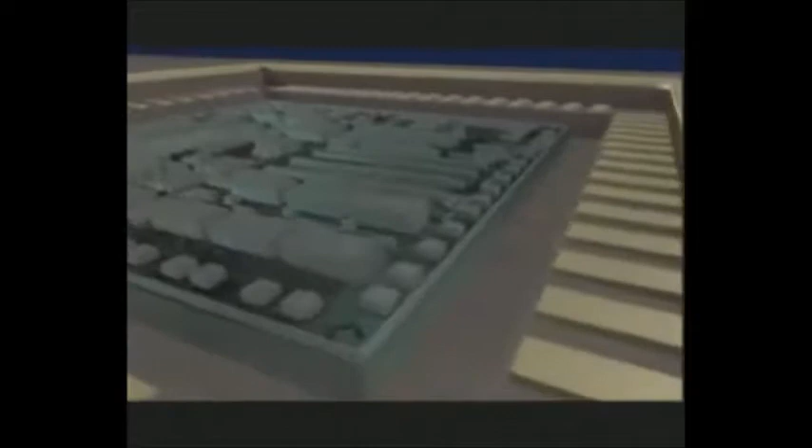The building blocks in chips are not only becoming ever smaller, but our designers are also making the chips cleverer all the time, so as to create new possibilities continuously. This makes the equipment controlled by these chips better, safer, easier to operate, more energy efficient, and friendlier to the environment.

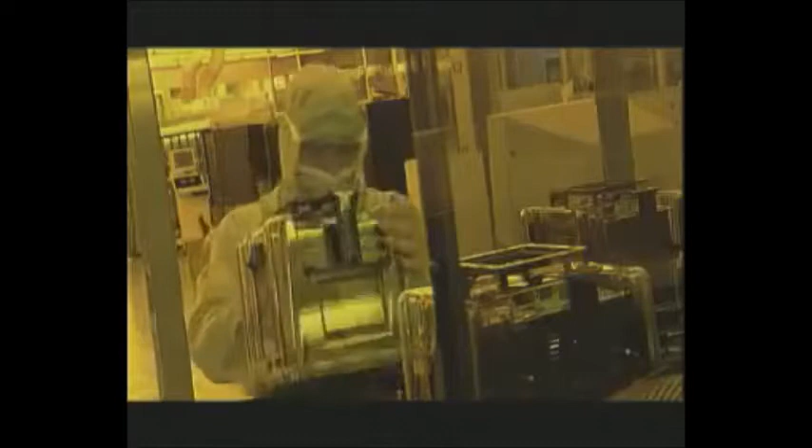Let's stride in 7-league boots through the ingenious process by means of which products such as chips are produced at Philips Nijmegen. We'll explain aspects such as the most important steps in the production of ICs, and to make this easier to understand, we'll begin with a series of animations.

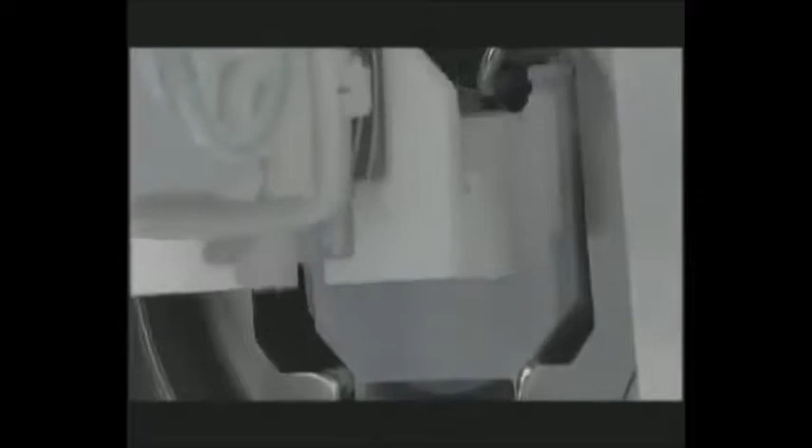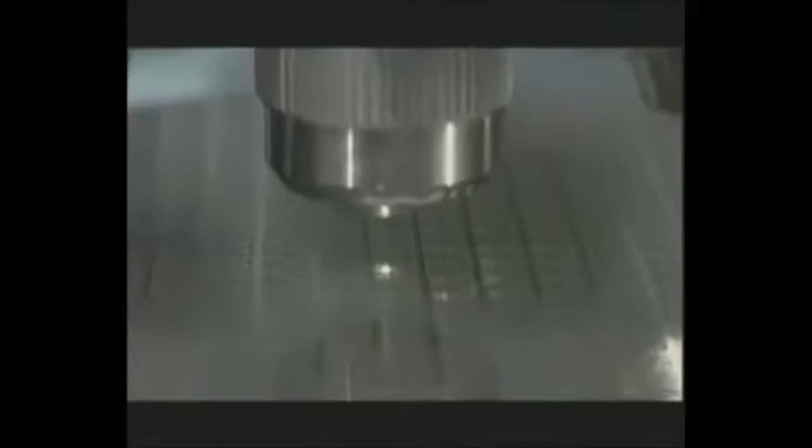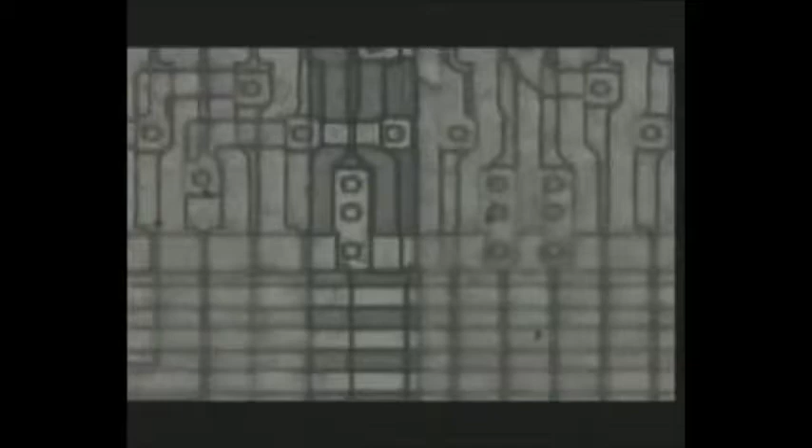A chip is an extremely small silicon plate, ranging from a couple to several dozen square millimeters in size. This tiny silicon plate is then filled up with a great number, sometimes millions, of microelements such as transistors, diodes or resistors, which together form an integrated circuit, the IC. We make a large number of chips all at once on a round silicon disc called a wafer or slice.

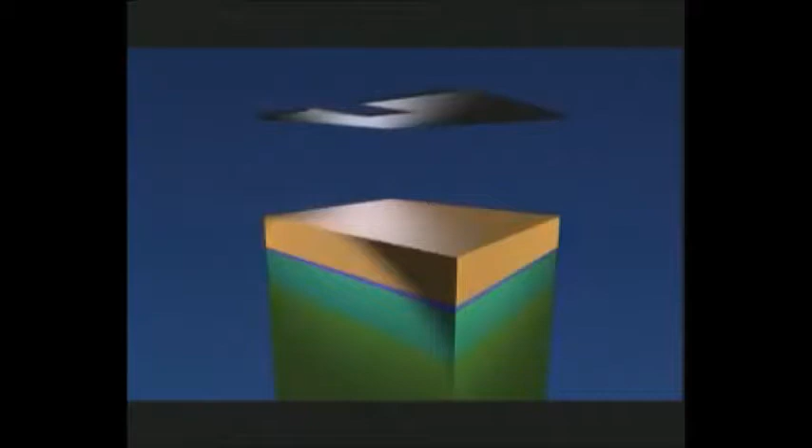First of all, we create a new layer of silicon on the slice, 1/100th of a millimeter thick. We then oxidize this silicon layer in an oven, so that an even thinner insulating layer is created on top of it. We then apply a coat of light-sensitive lacquer. We expose the lacquer through a kind of photographic negative, so that the lacquer dissolves in certain places.

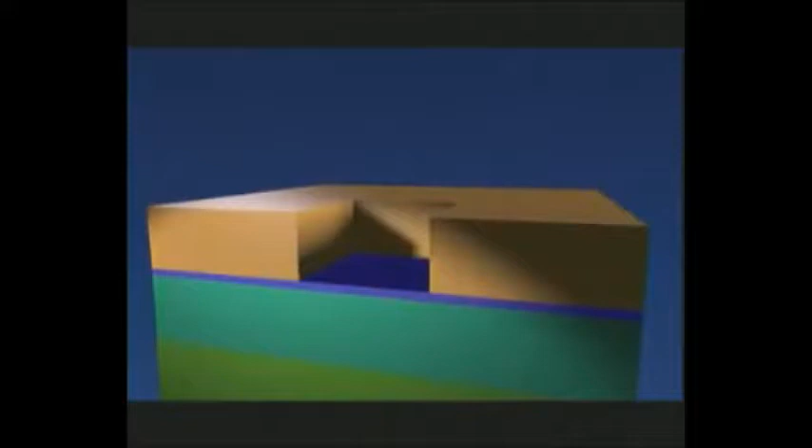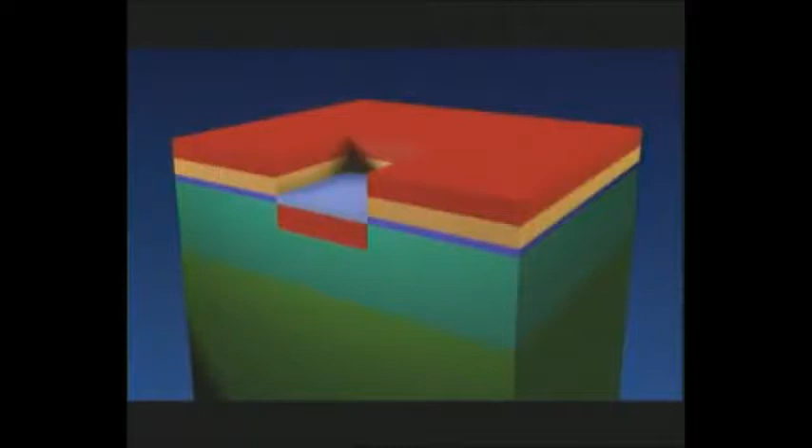Then, in the places where there is no more lacquer, we shoot atoms with great accuracy through the oxidized layer into the silicon. The layer of lacquer is then no longer required and is therefore removed from the slice. We then ensure that the atoms penetrate a little deeper into the silicon by a few thousandths of a millimeter.

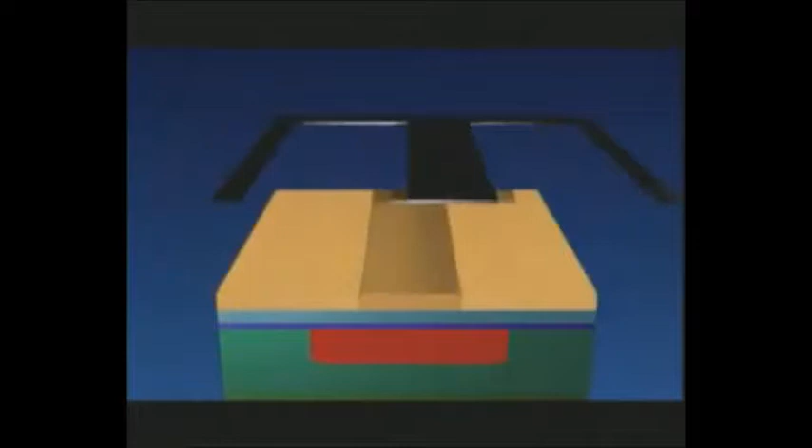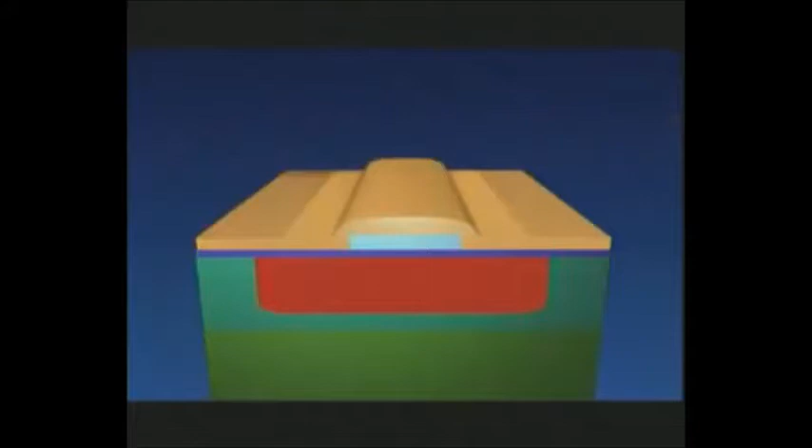A new silicon layer is applied over the oxide layer. And once again, a layer of lacquer is applied, exposed, and developed. The silicon which is uncovered by this process is then etched away. Another series of treatments involving lacquering, exposure, bombardment with atoms which penetrate the silicon, new oxide layers, etc. is performed until the whole pattern is complete in all its layers.

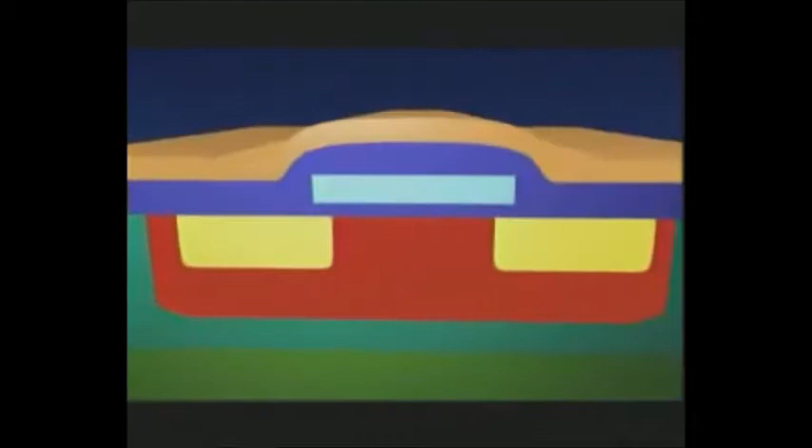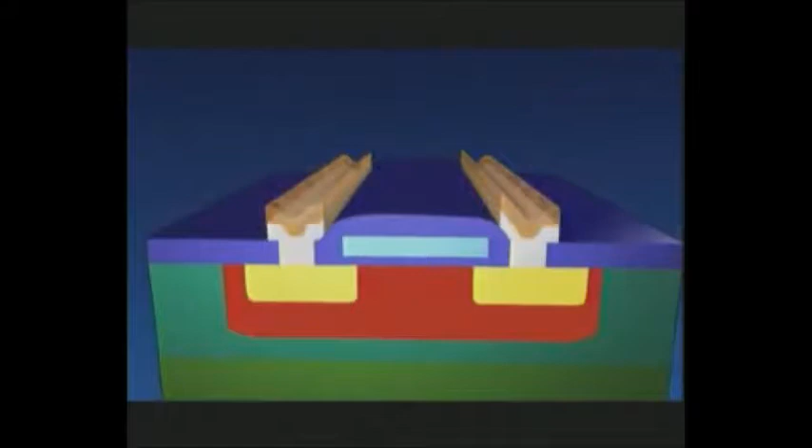Some 300 to 400 process steps are required, along with 15 to 20 different masks with microscopically small patterns. The final step in the process is the connection of the various, almost invisible, tiny elements in the silicon. This is how we make an electronic circuit, an IC or chip.

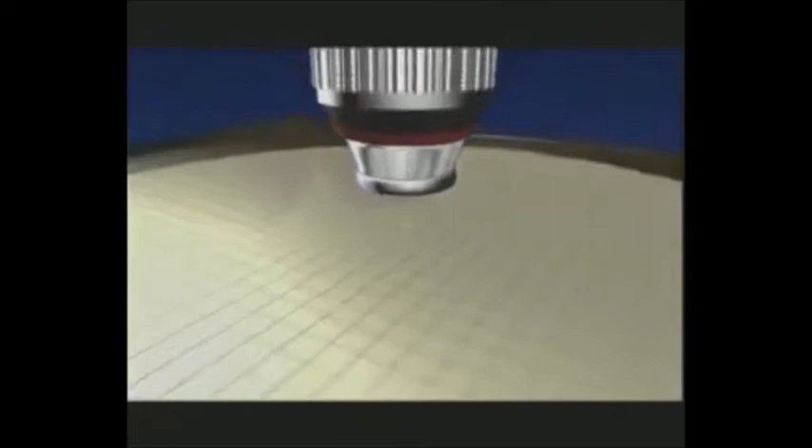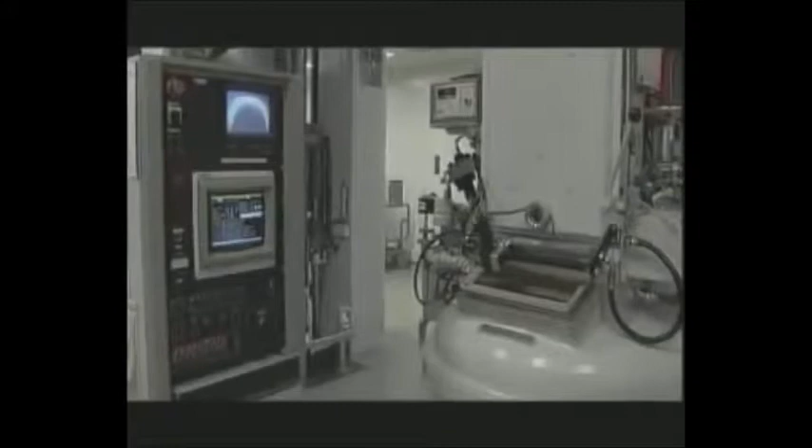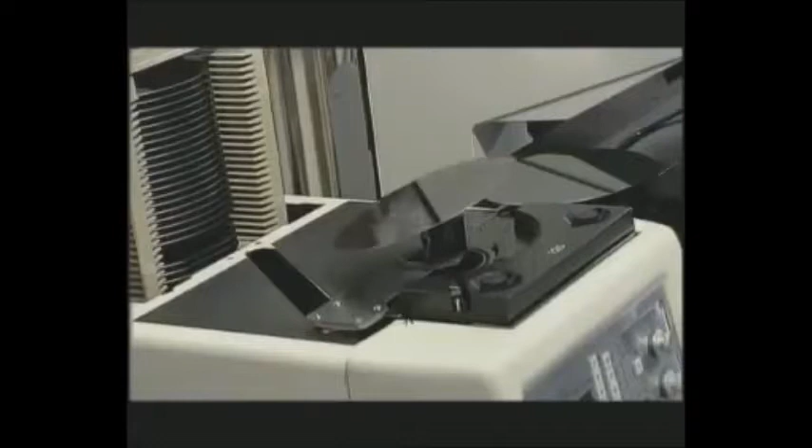Naturally, we have a particularly good relationship with our suppliers, as they too play a part in determining the final quality of our products. Silicon is made from ordinary quartz sand, and rods of silicon are then created, or drawn, at extremely high temperatures. Thin slices are then sawn off these rods with great accuracy. The ICs will be produced on these slices of silicon, for which purpose the slices will undergo 300 to 400 processes.

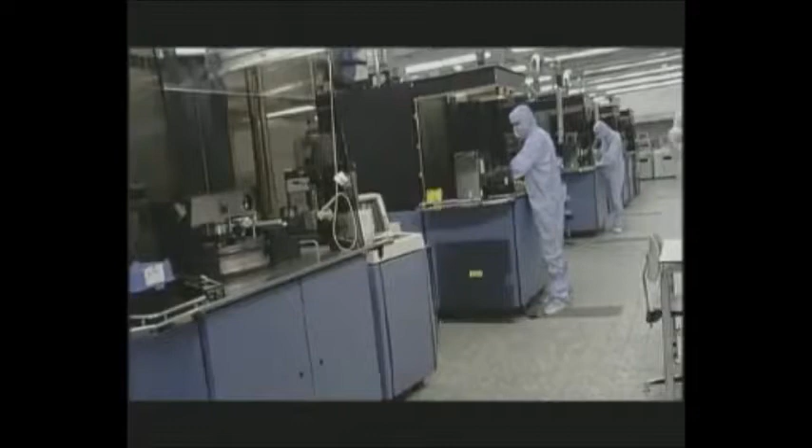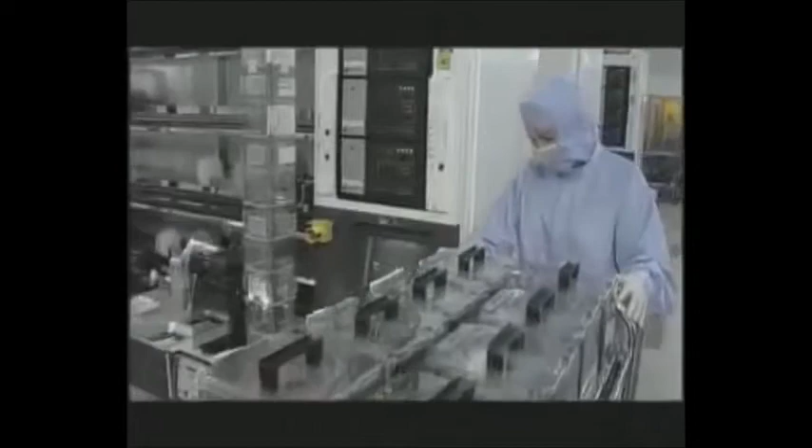The first step in the production process is as follows. In this special oven, the slices are covered by a new thin layer of very pure silicon, into which the transistors and other components can be built. The slices with a new layer of silicon are placed in other boxes, where the silicon is allowed to oxidize. This insulating oxide layer can be removed at a later stage when necessary.

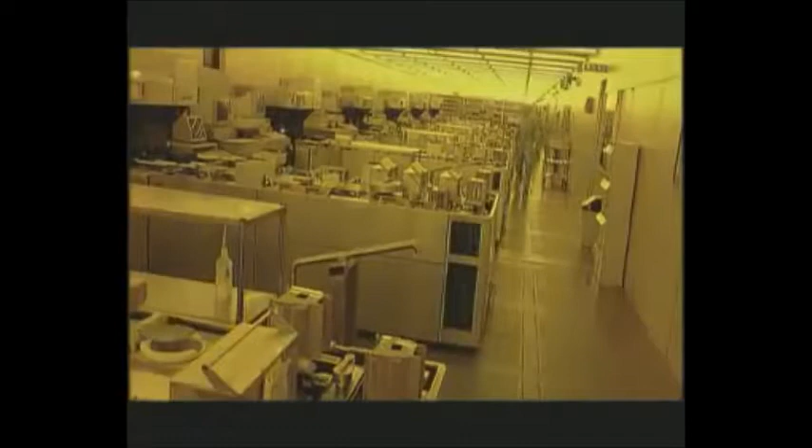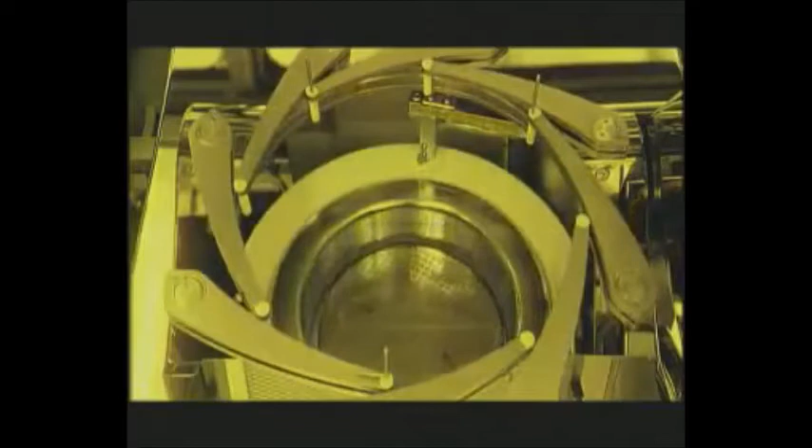These are known as the yellow rooms. Here, extremely intelligent, fully automated machines are used to apply the light-sensitive layer of lacquer to the oxide on the slices and to expose the slices. Yellow light is used in these rooms, as the lacquer is not sensitive to this. The patterns on the masks, a kind of photographic negative, are of course designed by our own development engineers.

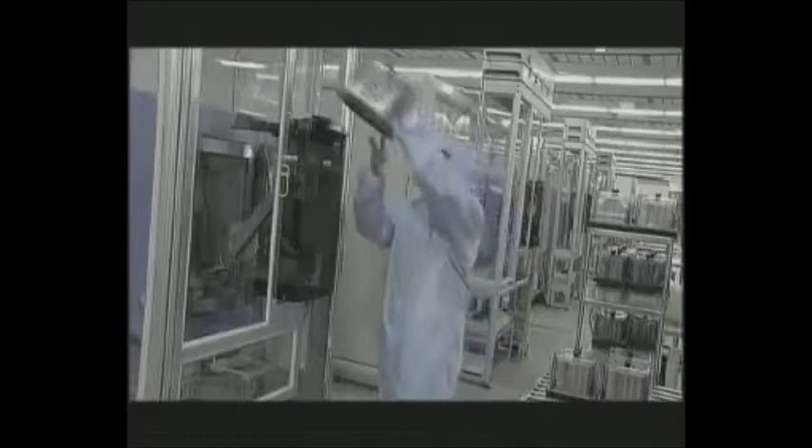The templates themselves are made by other specialists. It goes without saying that we also cooperate very closely with these suppliers and equipment manufacturers. In these so-called implanters, specific atoms can be shot into the unprotected areas of the silicon to give them a positive or negative conductivity. This is done incredibly accurately. For example, 1 atom in 100,000 silicon atoms.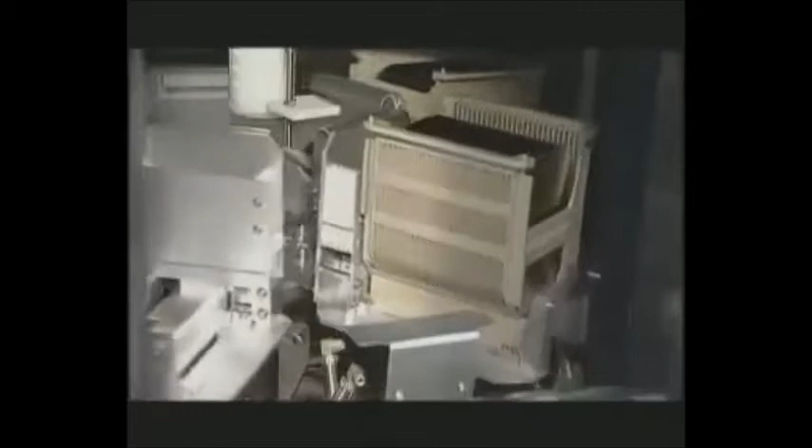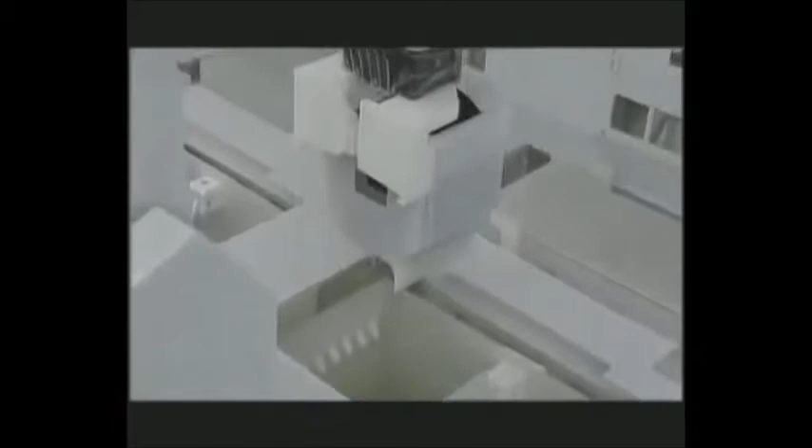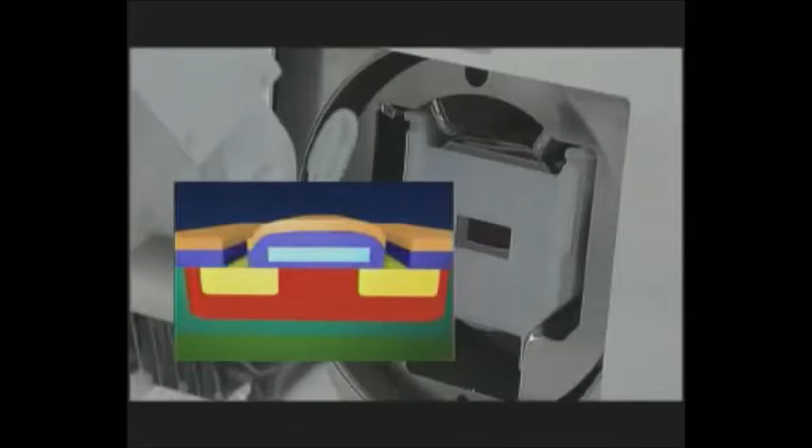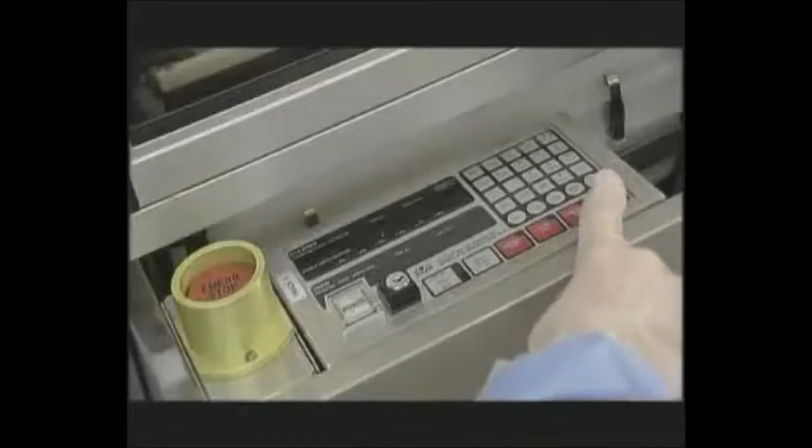One of the next steps in the process is etching, removing material locally from the slices with great accuracy. This department uses an automatically controlled process involving acids and caustics. Another technique used is dry etching with an etching gas. This picture gives an impression of the technology involved in this dry etching.

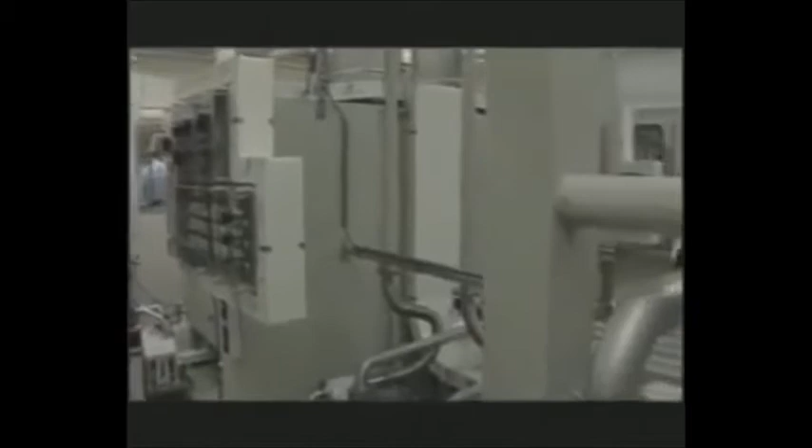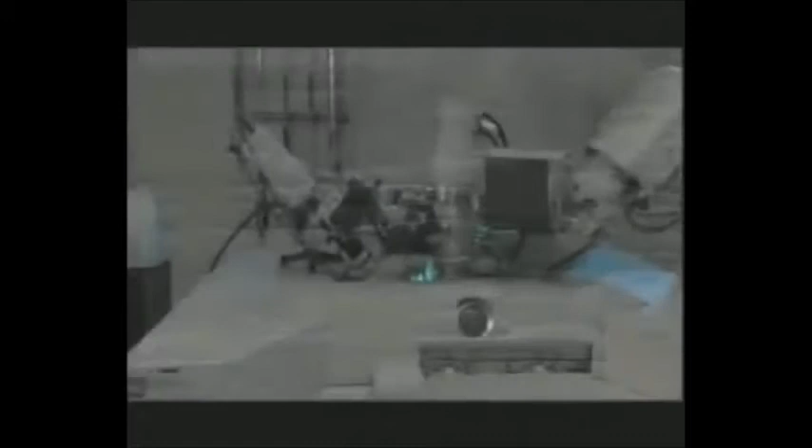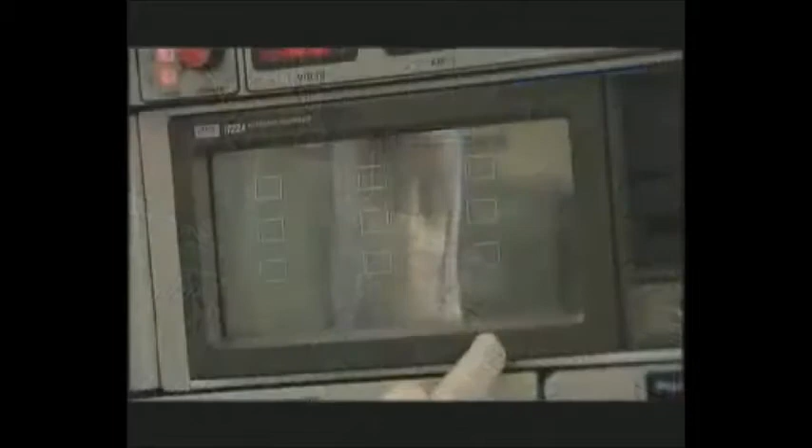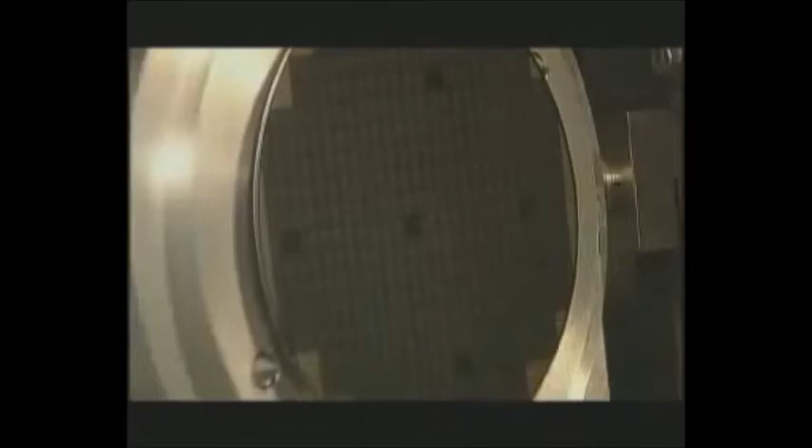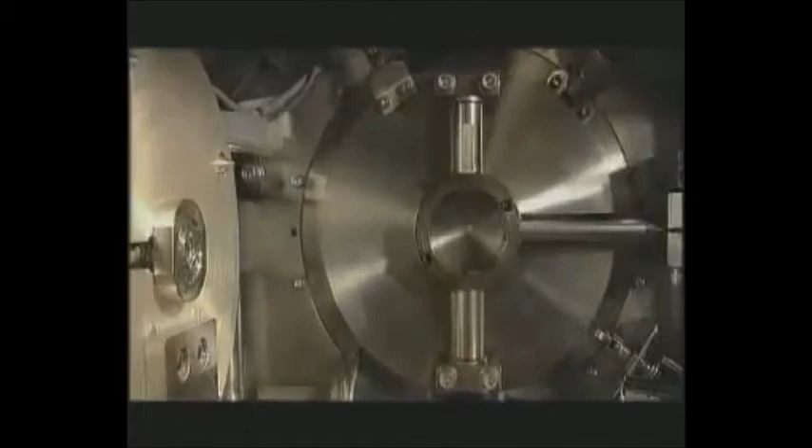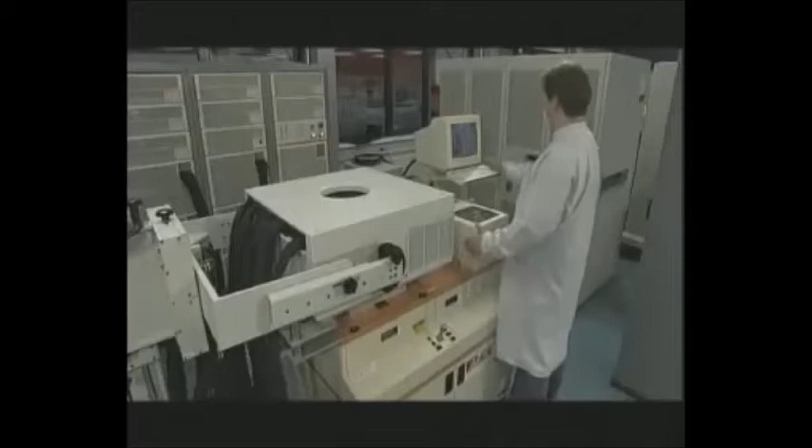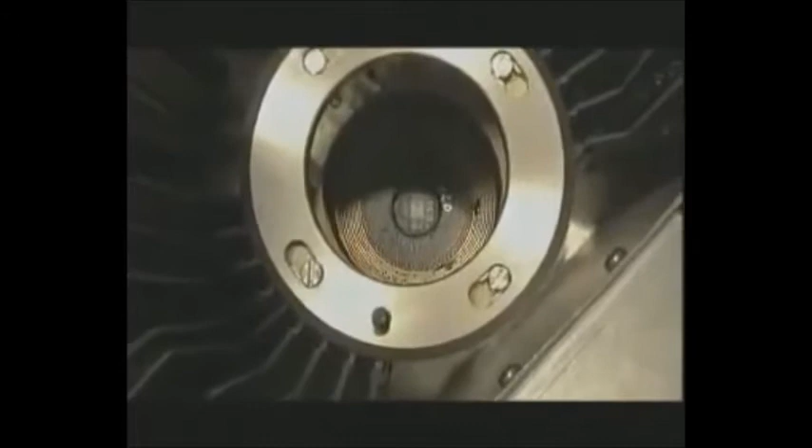The innumerable processes, which take approximately 3 weeks to complete, are concluded by an initial visual inspection. Each chip is checked for a number of essential functions. After testing, chips which do not comply with the specifications are marked with an ink dot, so they'll no longer be used.

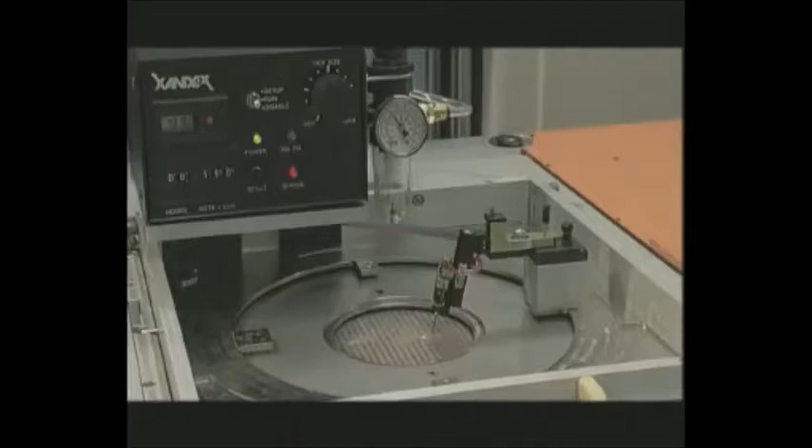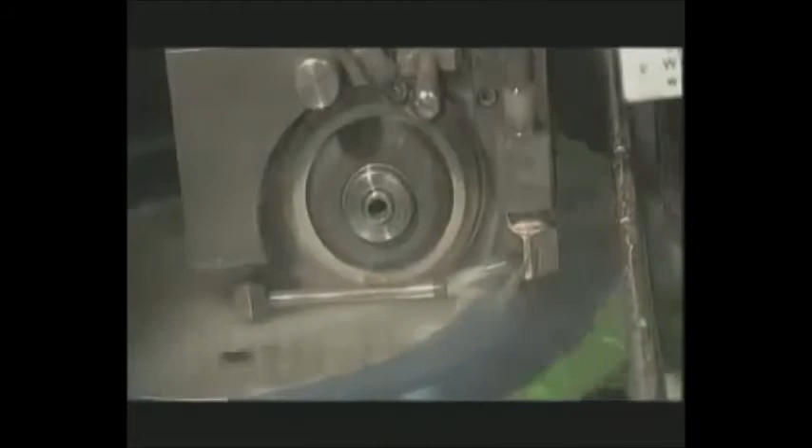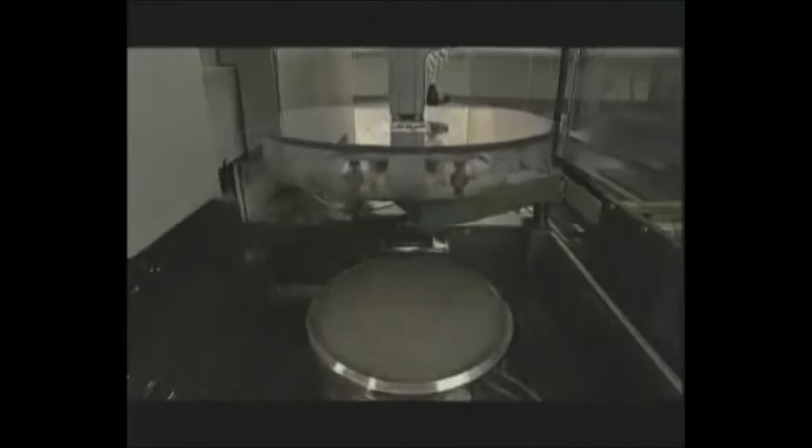Once they've been tested, the chips are ready for assembly. First of all, the slices are laid on a layer of adhesive film and then almost sawn through in 2 directions by a special, amazingly accurate sawing machine, so that the chips are almost separated. The slices are then carefully packaged and sent to the assembly centres in the Far East: Bangkok, Hong Kong, Manila or Kaohsiung in Taiwan.